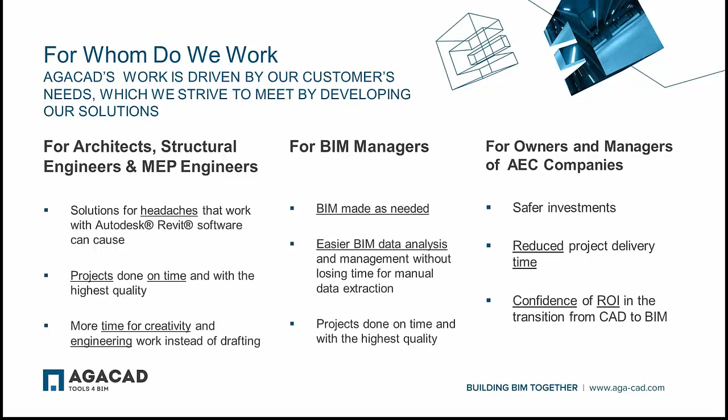The most important value of our team is customer alignment. We strive to respond to the needs of every client. Our work is driven by our customer needs, and the benefits we strive to deliver to our customers are less stress in daily work, easier BIM, and satisfaction with return of investment. Our promise to our customers is reducing BIM stress.

At the moment, we can divide all our products into 9 parts. Here on the top, we have a group called MEP Engineering, where you can find solutions for MEP engineers.

We have solutions for working with fire protection systems, air terminals, radiators, and for distributing hangers automatically. Then we have Cut Opening, which is very powerful for making openings around pipes, ducts, cable trays, and conduits in walls, floors, ceilings, beams, and columns.

Then we have BIM Tree Manager, which goes for managing parameters and parameter values that are used in the project.

Then we have 2 products in the Sustainable Design group. Then we have 4 solutions for browsing families and loading them into the project, and at the same time for managing your content - this is the group called Smart Browser.

Then we have Tools for Revit, where you can find different solutions for documentation and for modeling.

Then we have Smart Assemblies, which goes for making shop drawings for your concrete or steel elements.

Then we have Wood Framing. Here you can see 4 solutions for making wooden frames for walls and floors. At the same time, we can make rafters and other wooden elements for your roof. Truss Plus is very powerful for making wooden trusses automatically according to your roof shape. So those are very powerful solutions for using wooden frames and for framing your walls, floors, and roof.

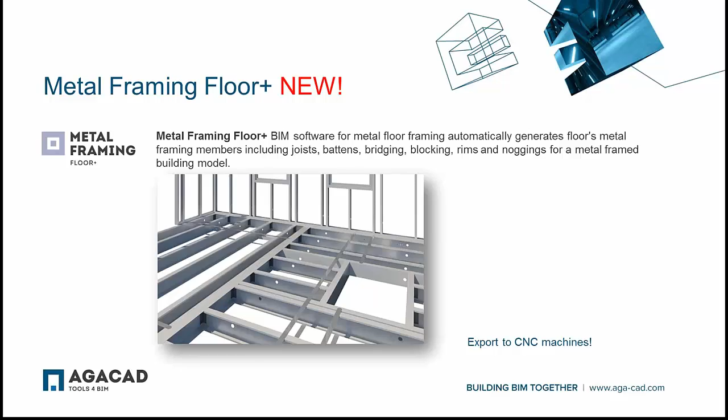Rafter Plus is very professional for metal framing, and here you can easily perform roof framing using light gauge steel elements. Truss Plus also provides a set of very intuitive framing tools for metal roof frame design. At the same time, we can also make shop drawings.

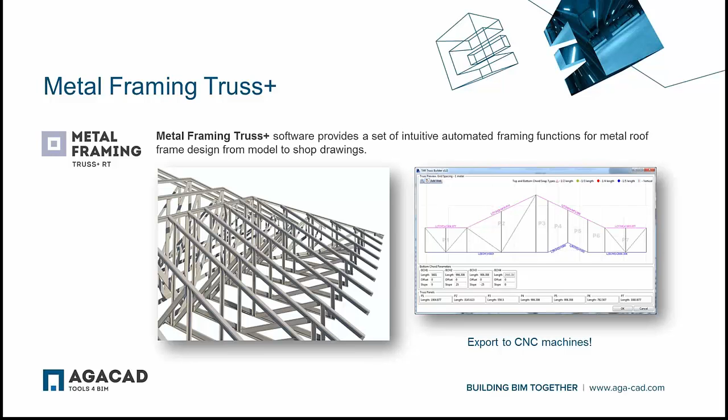First, I would like to start with the main types that we have at the moment, and for the Wall Plus we have created the most popular profiles.

So here we have CNC chamfered profiles and the CNC C+C system. Here, as you can see, there are chamfered ends of those beams, and all those families are structural framings, and all of them have analytical lines.

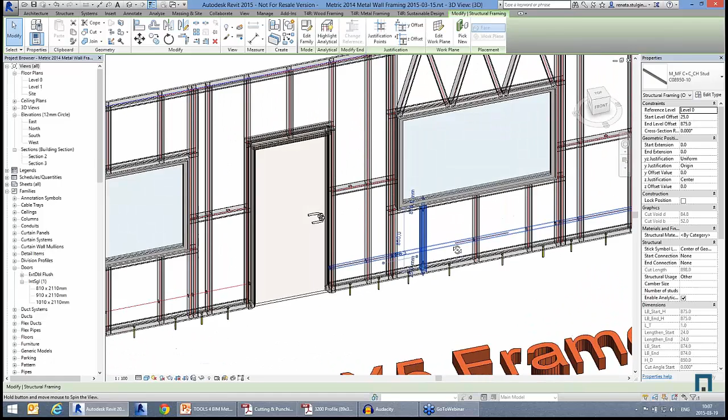For example, such kind of system is very popular for pinnacle manufacturers. One more type is also CNC chamfered, but this system is mostly used for Howick manufacturers.

Then we have C+C, the general frame, and as you can see here in this project, the tool can also automatically handle different metal connections.

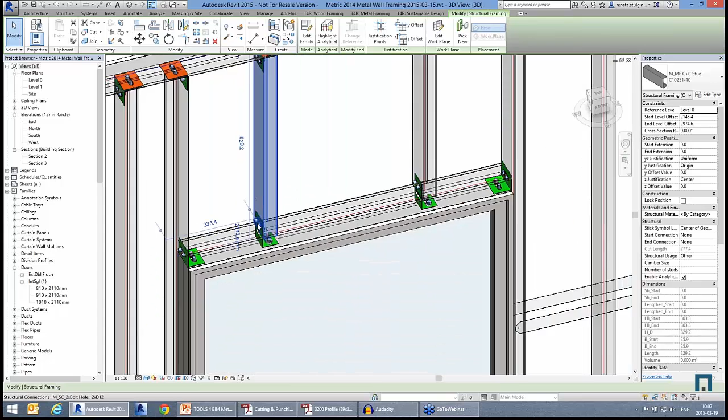Then one more type mostly goes for metal manufacturers, called C+U. Here you can see how those frames look. One more C+U standard frame, and let's take a look into those beams and the different metal connections between those frames.

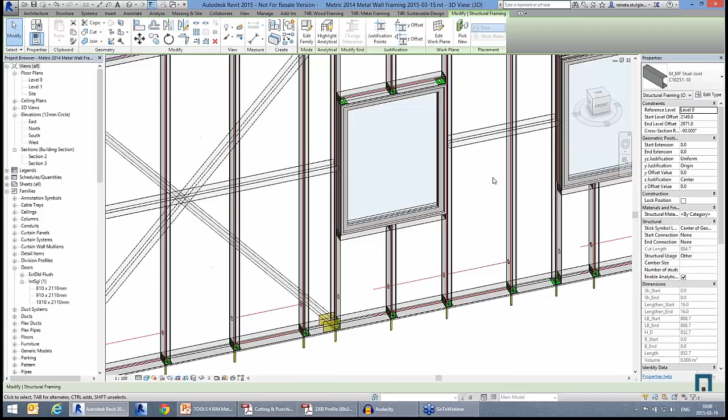Actually, these families are our sample created families, but anytime you can use your own if necessary. At the same time, you can modify those families anytime. Now let's start from the beginning.

I'm going to the project suggested for C+C and C+U profiles. Before working with the project, you have to load the families and schedules into it. The Wall Plus tools you can find in the separate metal framing Wall Plus tab. First you load the families into the project, then check the configuration.

You have to go to framing configuration. The most popular configurations are already created, but anytime you can save and change that for your future projects. At the same time, you can share that configuration with your colleagues.

Before working through that configuration, I want to note that we can add the main frame, but also the secondary frame, and you can have different framings placed into several wall layers. Let's take a look into those settings.

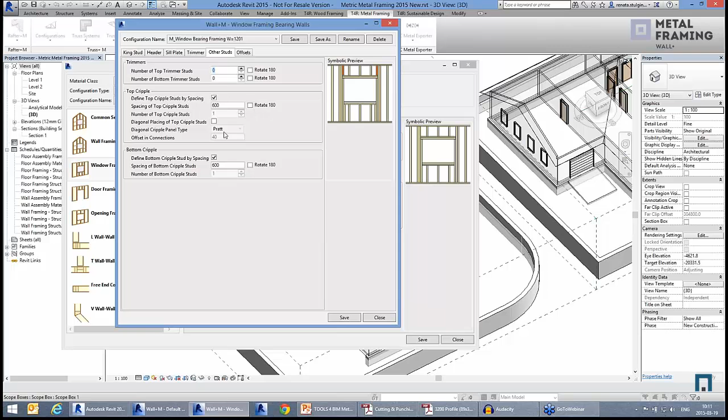Then we have window framing. Here you predefine the types you're going to use: what kind of header, what will be the sill plates, trimmers, other studs. Also you can predefine to use Pratt or Warren diagonal cripples, and additional offsets.

Very similar settings we have for the door framing. Again, you can predefine your own settings for different door sizes.

Then opening framing, which goes for cases where a duct or pipe is going through the wall. You can also predefine configuration for framing such openings.

Then we have L connections, and in the new version we added additional L connections. Then here we have T connections, free end connections, V connections. We can also add an additional ridge stud if necessary.

Then we have bridgings or noggings, so you can predefine the settings for adding those bridgings or noggings.

Then there is a new feature in the new Wall Plus version: we added continuous bridging or nogging additionally if needed, plus an additional setting for adding secondary bridging and nogging. Then we can add bracings, additional studs if necessary, and additional noggings.

Then we can add details automatically. At the moment, with my configuration, I'm going to add anchors, and here you can predefine exactly where to put those anchors into the frame.

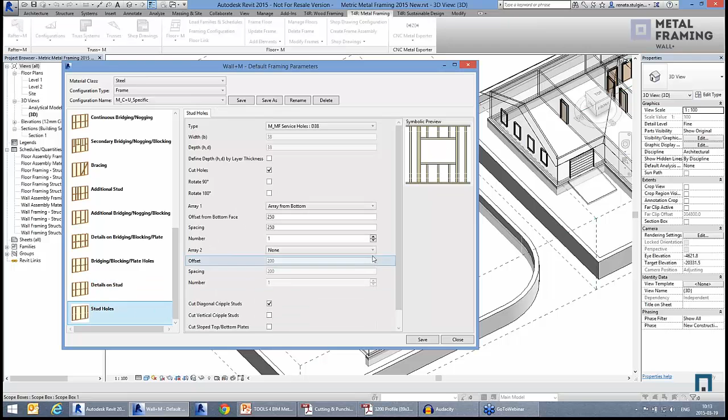It could be service holes, for example, for the cables and so on. You can save that configuration for future use under your own name, and as I said before, you can share it later with your colleagues.

After making that configuration, you have to make a link between the configuration and your wall layers. In my case, here I have the wall with 3 layers, and this is the list of all wall types used in this project.

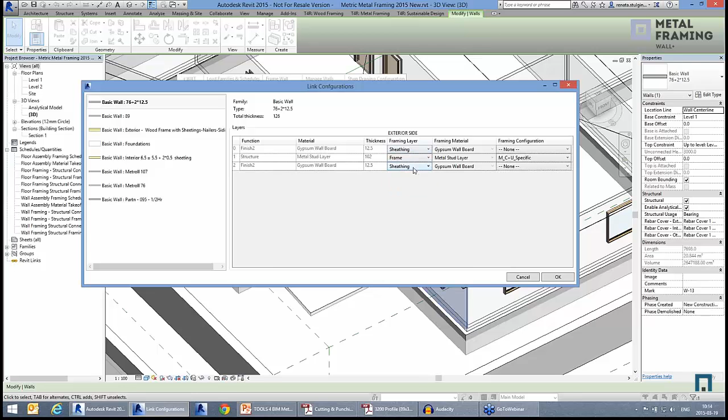Here you just need to say what exactly you're going to put into every layer. Into this layer I'm going to add the frame, using this configuration in this wall type. Then I'm going to add sheetings from both sides of this frame, and for one more wall type in this building I'm going to use a wall link, using C+C template profiles.

After adding that link, you just need to select the walls from the model. I'm going to select them from different building sites - it doesn't matter, you can select different types, and now the tool will add those frames into those walls. At the moment I have selected 6 walls, and now we just have to wait a minute for the tool to make all those frames automatically.

The tool will look into the configuration that we did before, and it will take a look into the link between the configuration and the wall layers, and then it will add the frames automatically.

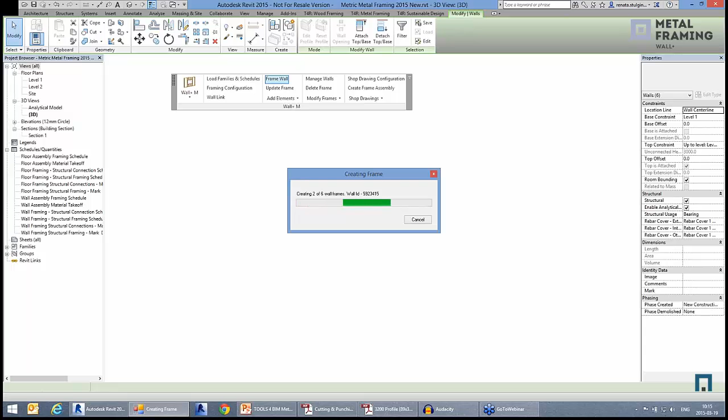Also, I want to note that all those frames are structural frames, and they are actually regular families created under the structural framing category. So those frames have all analytical lines, and you will be able to later use that model in a calculation.

You can export that model into a calculation system. For example, you can add loads here in Revit and then make a calculation in, for example, Autodesk Robot, and so on.

And also, all those frames - we have the possibility to export to CNC machines. So all those frames can be very easily exported to a CNC file and pushed into a fabrication machine.

Okay, so we're finishing with those walls. As you can see, the tool is showing you 4 walls that are already framed, and now we're finishing with the other 2 walls.

Also, if you have a complex shape of your wall, it doesn't matter - the tool will still handle really complex top or bottom shapes of the wall.

Okay, and we're finishing with making those frames automatically. You can just imagine how much time it would take to make that manually, using only regular Revit functionalities. Here we have spent about a minute for framing 6 walls.

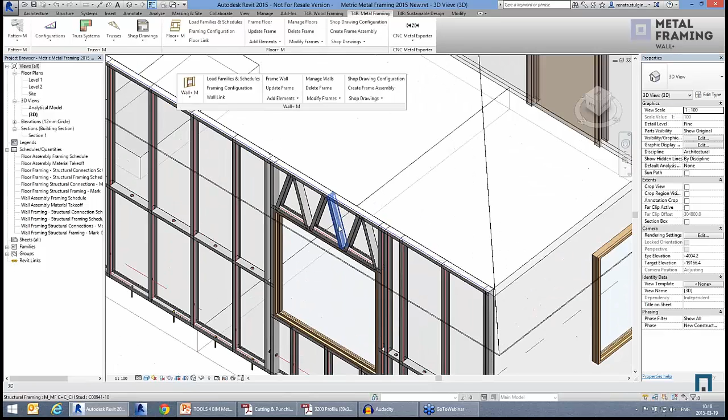Okay, so here we have C+C profiles, and we can take a look. As you can see, the anchors are already placed, and here we have the C+C profiles. Now we can take a look, and here we can see how the header looks above this window.

Now we can take a look into this model, and here we have C+U profiles and the C+U system. Let's look into the plan view - the frames are added into the layer where they should be. Now we can also take a look into the section above the window.

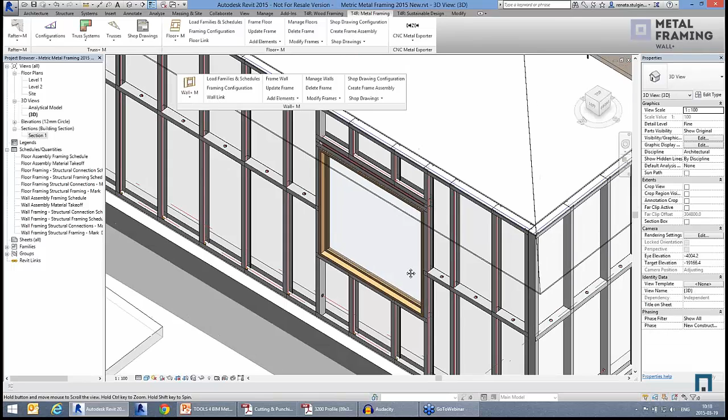Here we have such a header above the window. As you can see, we have a U profile, then two C profiles, and then a U profile on top. But this is only one configuration that we've adjusted for this window - it could actually be different configurations and different headers above the window.

As you can see in my case, we added different configurations for different window sizes. So for the small window we can use such a configuration, such headers, and for the bigger one we can use, for example, diagonal cripples if necessary.

Now, if we make any changes in the model - let's say I move this window a little bit - it's not a problem. Anytime, we can select any frame from the wall and just press update frame.

And now the tool will reframe this wall segment. Additionally, if we want to add additional elements, you can press on add elements, and there are many functionalities that you can add additionally.

So there could be a secondary frame, one more layer with metal frames if necessary, and then we can add additional studs. You just need to select the stud, predefine the settings, press OK, and the tool will add the additional stud.

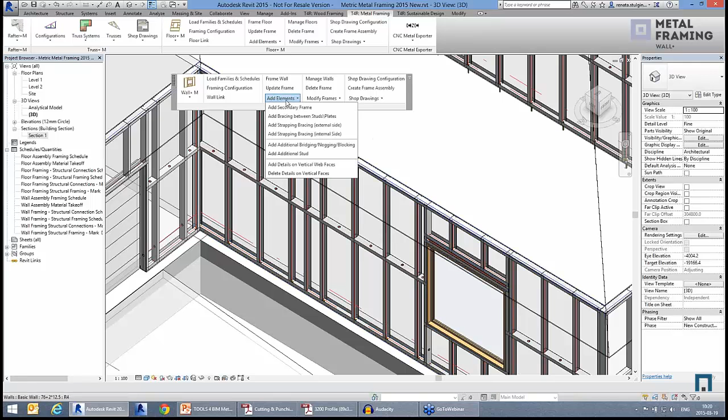Then we can add additional bridgings or blockings. You just need to predefine 2 studs, select the settings, press OK, and the tool will add the additional horizontal element.

Now we can add additional bracings. Let's go to add bracings between the studs or plates, and you just need to select families and elements between those plates. The tool will add bracings.

So it's very easy, just have to select different plates. Let's add from this side to this one, and again from here to here.

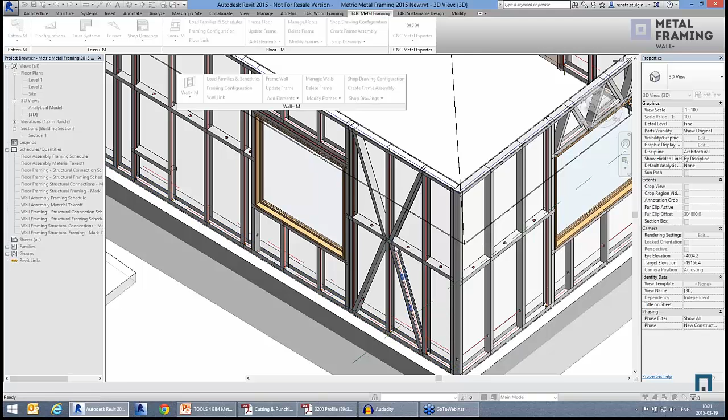Then we can very easily add additional connections. This is also the new feature that we added into the Wall Plus. Anytime you can go to modify wall framing.

Here let's go to the details on the bridging, blockings and plates, and you can add different plates and different connections. So here I'm going to add an angle connector, and I'm going to insert those details.

It will be on the open face of this stud side. Then I'm going to say it will be on the open faces on the top and bottom plates. Then I'm going to include openings, and add details if the host element is crossing the joist.

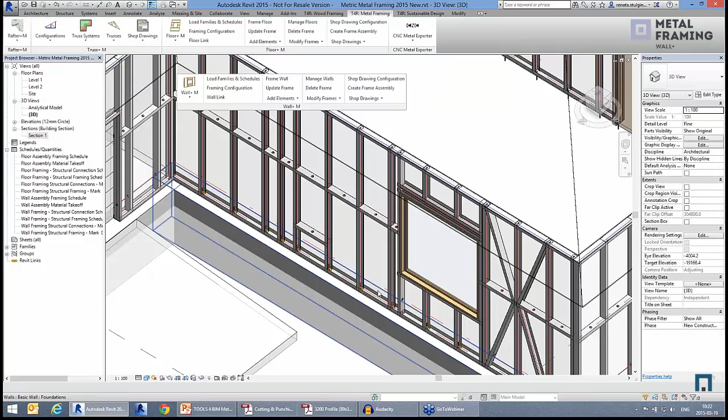So it's very easy, you just need to predefine the settings, press OK, and now the tool will add those metal details on our selected wall frame. If you want, you can actually predefine that in the framing configuration and add the frame automatically with all those metal details, but anytime you can add them additionally if needed.

And the same we can see on the top plate. We can see them here.

And the families, as I said before, can be your families. You can make your own family with your own design, and the tool will distribute those families. You just have to make sure those families are face-based families, and that's it - you'll be able to easily distribute them.

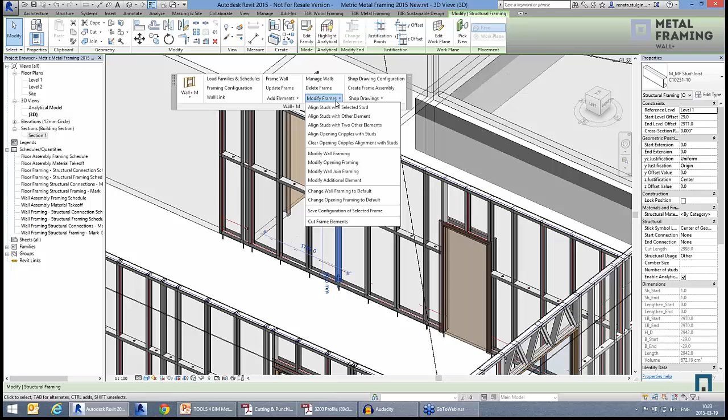Then we are going to modify this wall framing, and here I'm going to add straps. So I'm going to modify the framing and add the strap family. I'm not going to rotate this, and we don't want to cut that family, and I'm going to change the offset from the stud and from the plate.

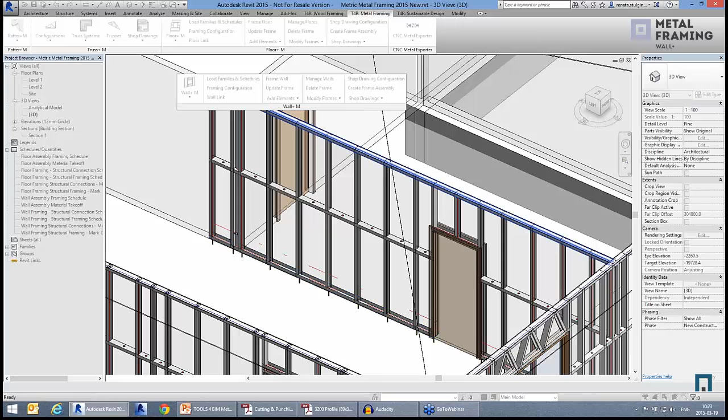After pressing OK, the tool will update this frame, and we will be able to add the bracing, but now the tool will know what kind of bracing I'm willing to add. So again, I just need to select the top and bottom plates, from the internal side.

And if it's necessary, you can add additional connectors. So here we're going to use - actually this could be added into the family. So we can also add an additional such plate.

And now, after making those frames, we can very easily make shop drawings, because now the tool knows everything about those families. Again, we can take a look into the analytical model. We can see that we have all those analytical lines, and we can make shop drawings.

So before making shop drawings, we have to go to shop drawing configuration, and this is very easy. You just need to predefine the views that you want to get in the assembly, because now the tool will make the assembly - collecting all families from the frame, from the wall, from one wall segment.

At the same time, the tool will make schedules, add tags automatically, and apply the view template for every view. So you can make your own view template with your own design, and the tool will apply that view template into, for example, the left side view, front side view, and the 3D view.

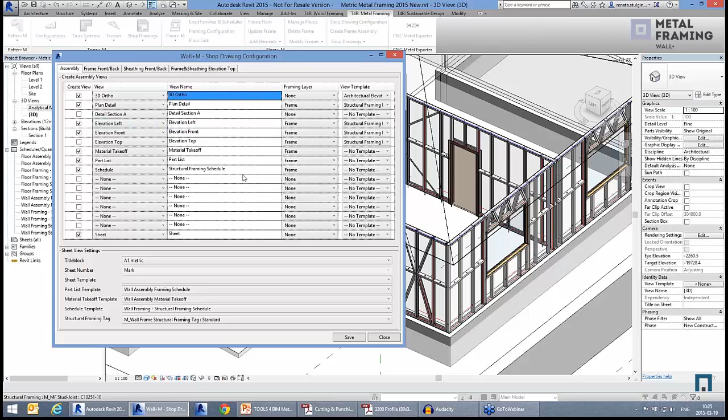And also you can make your own schedules with your own columns, and you can use those schedules as a template for making the part list for this frame and for making material takeoff.

So you can make your own schedule with your own columns and your own design, using the same schedules as created in my current project, and you can use that schedule as a template for making a part list or material takeoff.

Then you just need to predefine dimension types that you're going to use for the studs, for the vertical and horizontal frames, and additionally for the sheetings and for the top views. That's it, we can save that configuration.

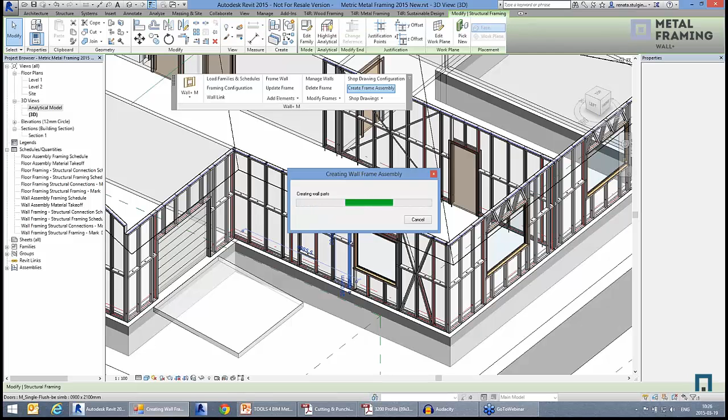Then we have to select any frame from the wall and go to Create Frame Assembly. Now the tool will collect all frames from this wall segment, then the tool will make all those views and add dimensions automatically.

Okay, so here we have a 3D view, then we have a front side view with all dimensions and tags. We just need to renumber our structural frames. For this we have a separate functionality that will sort structural frames, and then here we will see the numbers.

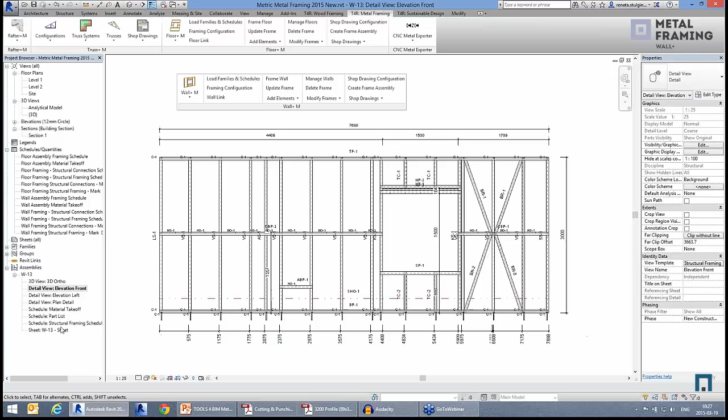And the same we're going to do with structural connections - we are going to renumber our structural connections automatically. So that's it, all those elements are renumbered, and now we can take a look again into the plan view.

Then we have material takeoff, then we have a part list, then a separate schedule for the regular frames without connections, and also the tool will calculate the mass for you, so it will be very easy to understand and get the total mass.

And now we can put everything into the sheet. So here I'm going to add the front side view, here I'm going to put the 3D view, then material takeoff, then the part list, and then a structural table only with the structural framings. Additionally, if it's necessary, maybe here we can add a top side view.

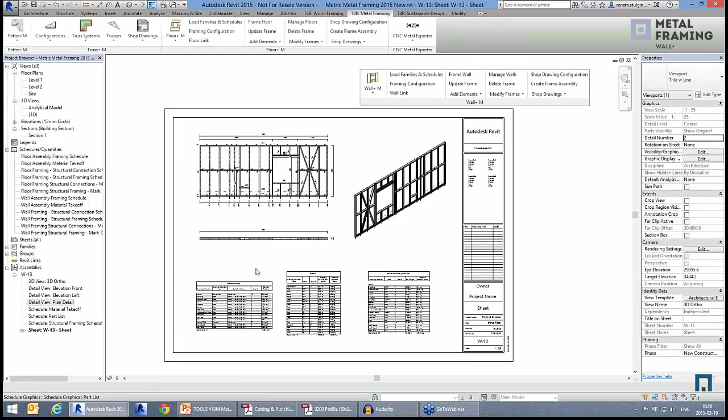That said, after making the first sheet, we can come back again into shop drawing configuration, and we can say that this sheet will be used as a template for the future assemblies.

Now I'm coming back again into my previous model. I'm going to use the same for my second wall, so again I have to select any frame and press Create Frame Assembly. Now the tool will do the same things - collect all frames, add dimensions, generate all those views - but at the same time, the tool will add those views into the sheet.

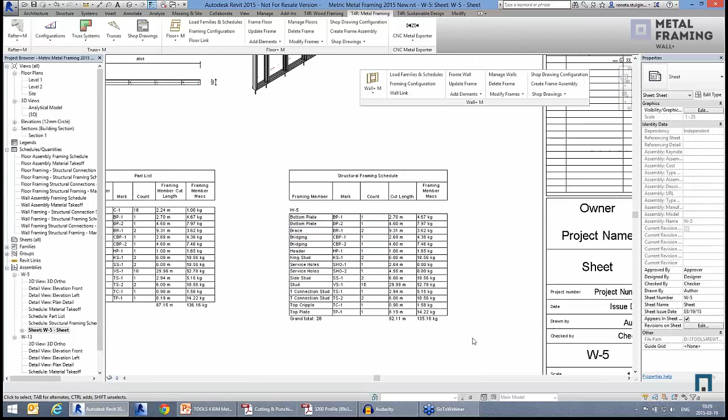Okay, and here we have really nice looking views with all those schedules. Elements are renumbered automatically. We have the length, we have the total mass, and we have everything about this frame, and later it can be exported into CNC. So this is an example that we did for one machine - we did such export for the walls and for the trusses.

Now let's take a look into Floor Plus. So this is actually our brand new product, but as you can see, it's very similar to Wall Plus.

The first thing that you have to do, again, is load the families into the project, but anytime you can modify those families if necessary. We're just providing the most popular families together with the product, but you can modify that anytime. And here you can get configurations for the main frames and for the battens, and that configuration, again, you can save for your future project.

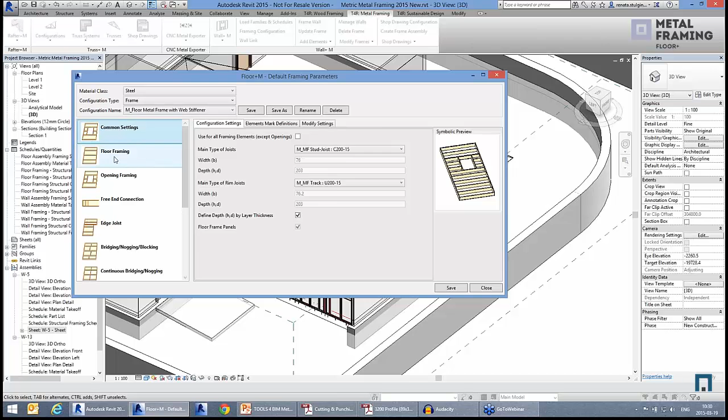There are very similar settings as it was with the wall, just everything goes for the floor panels. So you just need to add additional maybe joists, the bridgings, blockings, noggings, rim joists, and so on. So you have to predefine the settings, and again, you can save that setting for your future projects.

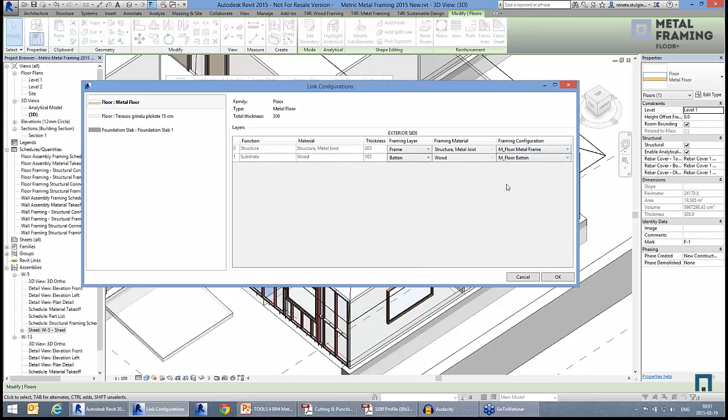And now if you have the wall and the floor, you just need to make the link. So let's take a look into this floor type - here I have two layers, and that's why I'm going to make a link. Let's say here I'm going to use the main frame with this configuration, and here I'm going to use battens in this secondary layer. Then, same as before, you just need to select your floor panels and use Frame Floors.

Okay, and now the tool is framing those two floors. It's adding—it actually looks into the configuration that we did before, and the tool knows where to put the frames because the tool reads information from the layer, and the tool makes those frames automatically, and adds connections.

So this is an extremely powerful product, and the scenario and main workflow is the same as it was with the Wall Plus. So if you know how to work with the Wall Plus, with the Floor Plus it will be the same. And as you can see in the Floor Plus, we also have the possibility to make shop drawings automatically.

Here we have those floor panels, and at the same time we have metal connections.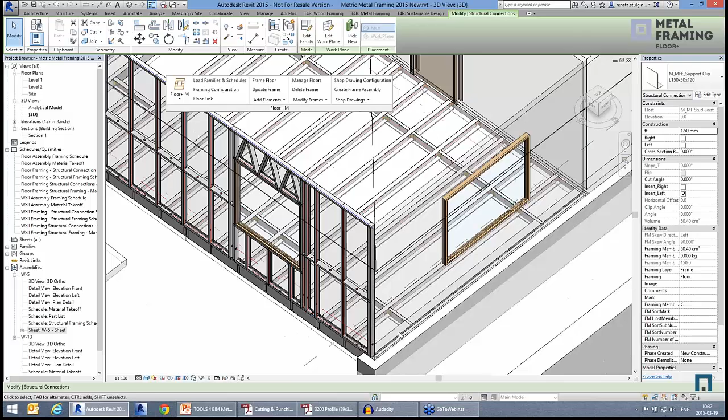Then we can very easily align the frames between the wall and floor panels if necessary, because here we have an additional possibility to align joists with other elements. So you can just select the frame from the wall, then select the frame from the floor, and the tool will align those frames for you.

And that's it—those frames are aligned automatically. And actually the families that we use, they are the same families.

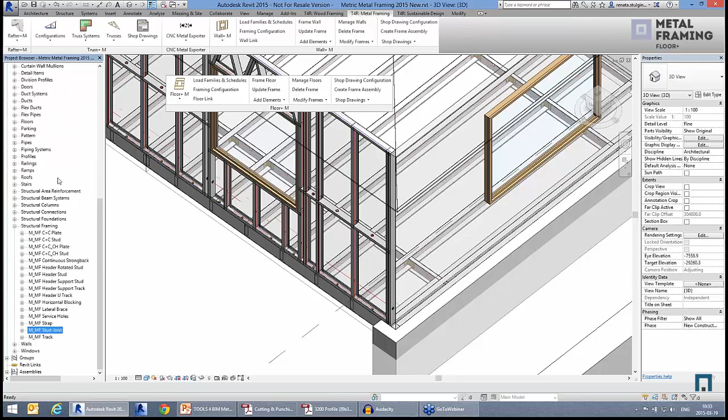If we take a look into the list of families that we use at the moment, you can see that the families we use for the wall and for the floor framing are actually the same. So we are using the same studs or joists, and also the same other elements—it could be the same for the floors and for the wall segments.

And then additionally we're going to add battens, so it will be added into one more layer that is below the main frame.

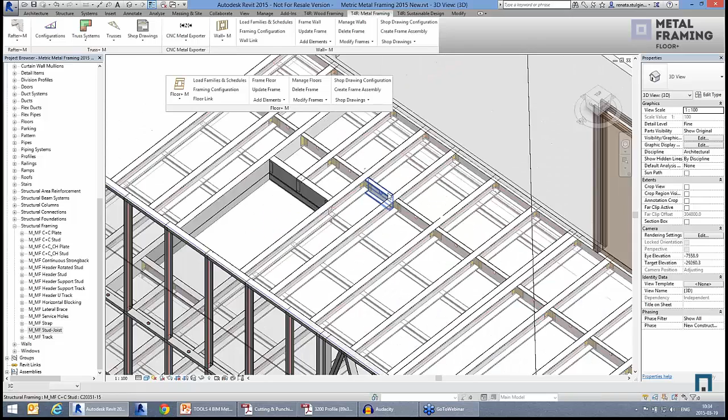And after making those frames, we can very easily make shop drawings. It's the same scenario as it was with the wall frames. So now we just need to select any frame from the floor and press on Create Frame Assembly.

And now the tool again collects all frames from this floor segment, and makes the shop drawing. It makes assembly views, adds the view templates, adds dimensions automatically, and we can take a look into this assembly that is created for the floor.

And again, we can very easily renumber our frames. Okay, and very easily we can renumber connections.

So it's the view for the main frame, but at the same time we can get the view together with the battens. Then again we have a material takeoff and then the part list.

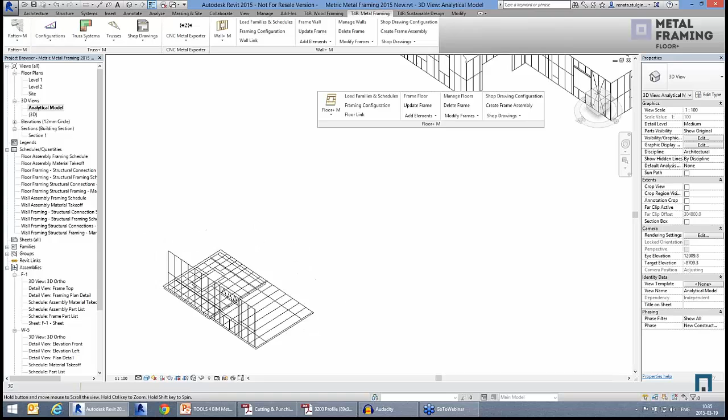And again, let's take a look into the analytical model. Here we have all those analytical lines created, because all those families are structural framings, and all of them can be used in the calculation system.

Okay, so thank you, and now I'm switching to Valence's screen, but just before that, I want to note again with the CNC machine that we can do an export the same as we did for the Metroll and for the Howick machines.

As you can see in this case, this is a specification from the Metroll, and there are operations that we use, so the tool automatically makes a separate file with all those operations and with all other necessary information used by the current machine.

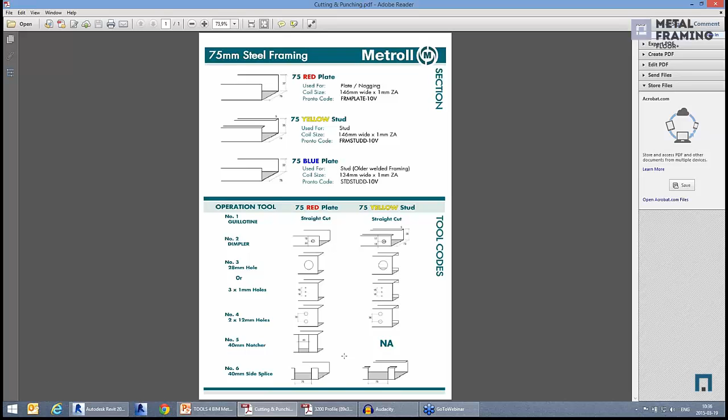But actually we can make an export to any other CNC machine if necessary. Just send me the specification of your machine and we will be able to make such an export to any machine you need.

Okay, so now I'm switching to Valence's screen, and he will continue with the framing. I will show you the Truss+ tool and the Roof Rafter Plus tool for roof structures modeling.

So I have this sample project here, and I will briefly run through the basic things you should know about this tool. The same as the previous tools, you have to load truss types into your project, then make some configurations, and then you can insert truss systems or separate individual trusses.

Then you can make drawings and export to CNC machines. So I already loaded truss types into this project, and you can see the configurations here.

I have 3 configurations for truss types here, and you can create more of them.

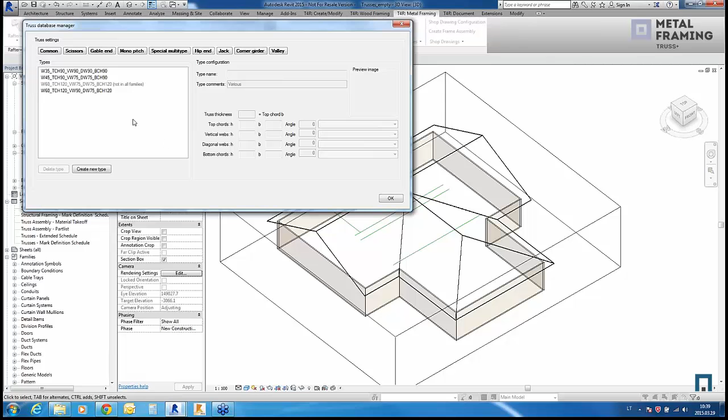You have new types now, and you can use them for your project for modeling later. So this is for truss configuration.

Let's go to the other configuration options for the truss system configuration, meaning what truss systems will be used for your model. We have gable end and hip end configurations, and we can modify or create new ones by selecting whether we will insert jack trusses, or only rafters, or corner girder trusses, choosing the type of truss by the top chord. We can create as many types as we want, and later use them for generating trusses.

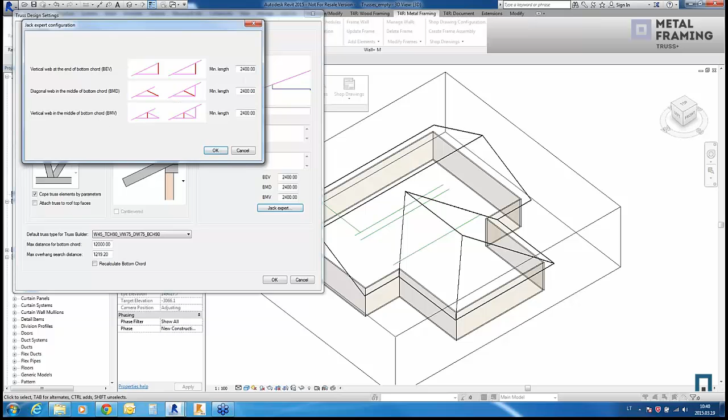Another thing is truss design settings - configurations for the jack and corner girder trusses. We can define how vertical and diagonal webs will be placed, what length, and so on. We can configure that or leave it by default. This option shows how elements will be cut to one another, and the end type of truss - we can select one of these. We also need to select the type of truss which will be used for our truss generating tool, which I'll show you later.

After we make configurations, we can go on with truss generation. First, I will show you how to generate a truss system for our roof. I will select this roof and pick the edges of my roof to define where the system should be placed.

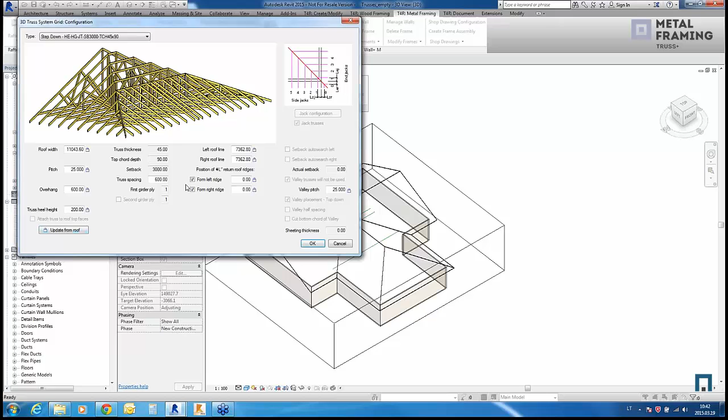Let's see how the solution will insert a 3D grid of trusses to my roof. So now we have a grid for the trusses. We can overview if we are happy with the form of this grid, and we can generate trusses in the place of this grid.

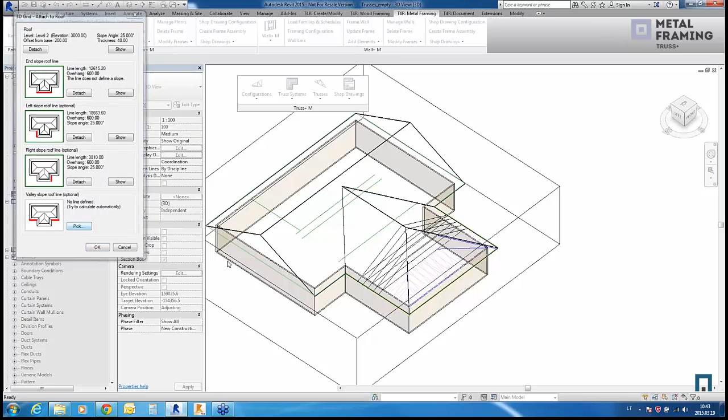I will add some more grid systems here at the end of this roof. Select the appropriate edges, and let's see - again we have a recommended type, and we can choose the type that we need.

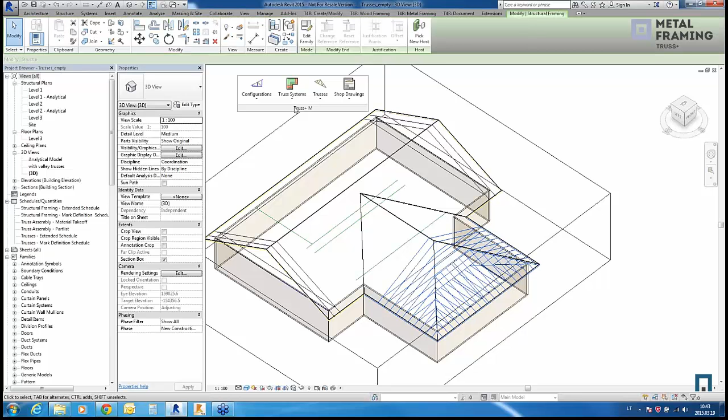We will create another one here because I want to show you all the roof trusses generated. Okay, so now we have some grids, and we can generate trusses by hitting the generate truss button.

Now we have this window where we have to select the type of truss which will be used for common trusses, for hip trusses, for jack trusses. We can select from the list the type of truss we will use. I will select the Fink type of truss for common trusses, and leave the rest by default.

Let's see - the tool will generate trusses in the same form as the grid system we already did, and it will cut elements according to the roof, cutting elements to each other, automatically. We will not need to go through the plans and sections and plane setups to make it manual, because catching all the angles manually would take a lot more time than this.

We can watch the progress or think about other issues at the design stage, so we save time to spend on thinking and design instead of modeling.

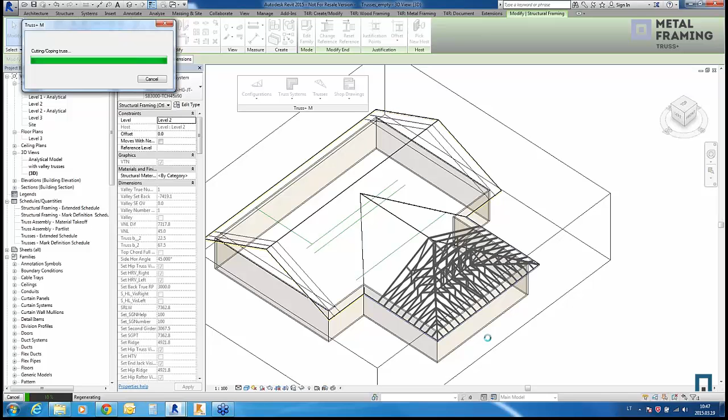We need to again select the types of trusses, gable end trusses. Let's see, it will select only two or three trusses.

Okay, so we have here gable end truss with window here, so we can insert this window, or we can just remove it by using family options. Let's do this same for the other end, so we can make sure we can do all the trusses for the building or the roof.

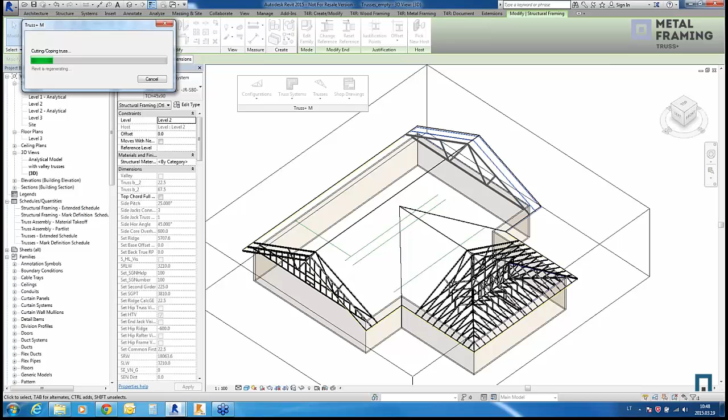So I want to show a few examples how to use truss systems and how to create separate trusses by using model lines. I have prepared here. So we have this truss systems, and we can use now other options to generate more trusses.

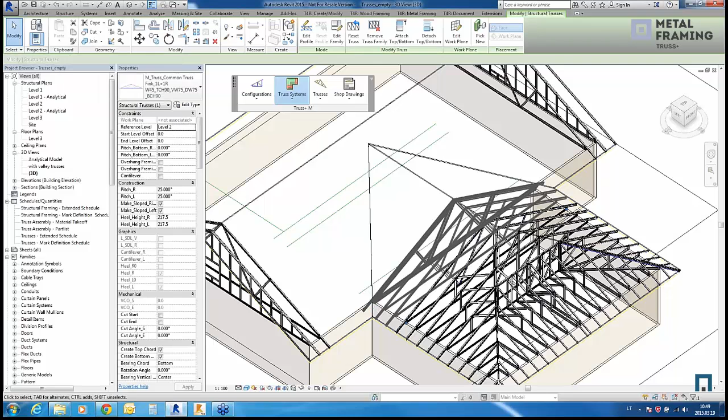I can select one of the trusses, and do like a photocopy of these trusses. It will generate by the same step as defining system grid. It will generate additional trusses until the situation is changed here, and it will generate 2 trusses for me here because it was also in configuration, so I can use them for support, and I can do the same with other trusses.

Let's see how it makes a copy of these trusses. 600 millimeters. Okay. And copy the same method here.

Okay, it cuts the overhang of the truss because of this situation here, and automatically, so we don't need to know about this.

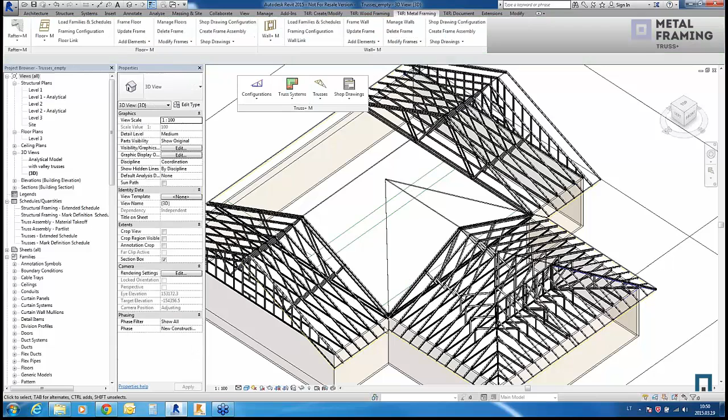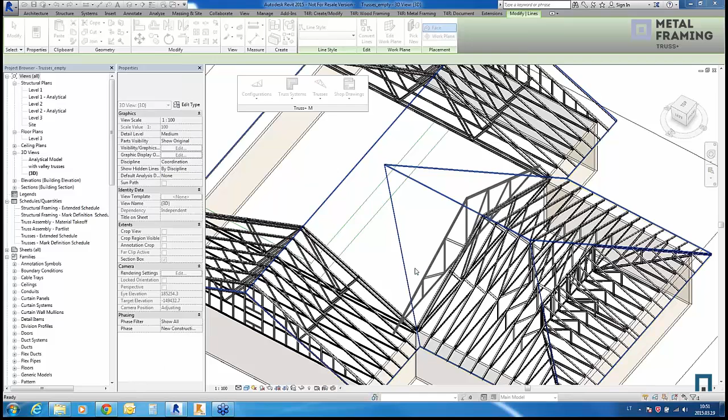So you will see the result. But the model line is just a model line which is drawn at a level of top of the walls. And we can see now that we have this kind of truss over here. I drew the model line from this truss to this truss, so we can use these trusses as a support for this truss. Okay, and I can do the same with other model lines.

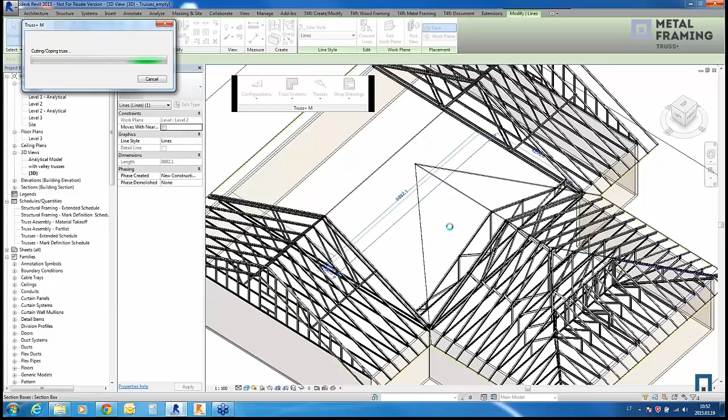I will again insert trusses by selecting model lines. I will select the type, the same type, and let's see. Now this model line is drawn at the edge of this roof intersection, and the truss has parallel chords.

And now I will use another command. I select these two trusses, and I select command to generate new trusses with a spacing like this in the middle of them and update from the roof. So it means that the tool will automatically create trusses, and it will update the shape of the truss according to the roof, because these slopes are different, and it should change the position of the top chord and add an element of depth and vertical struts.

So let's look at it. Yeah, so we see that it inserts the truss, then adjusts this truss now to the shape of the roof. And the step was 600 millimeters, so it creates a truss with this defined step.

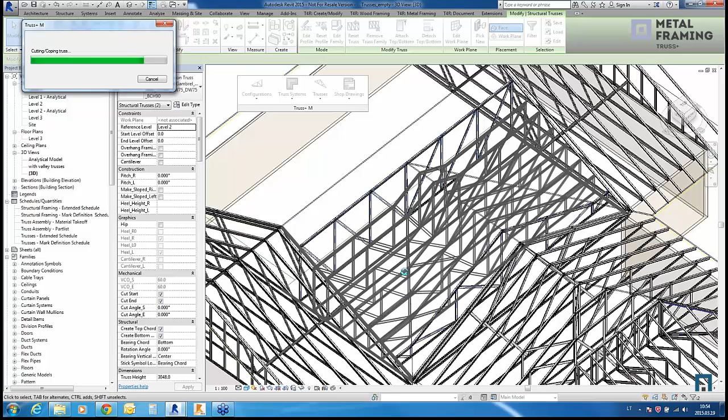Okay, it's almost over now. It will be really big headache if I would like to create this manually. Now we can see and enjoy all these new trusses.

Yeah, it's nice. Okay, and I will make another one truss here as a supporting truss. Select the same type, and I want to create monopitch trusses to this direction and support them on this truss I'm generating now. Okay, so I have this truss, and I have drawn already a model line here. So I will hit this model line, selecting trusses by selecting model line, and now I will select monopitch. This one. Okay.

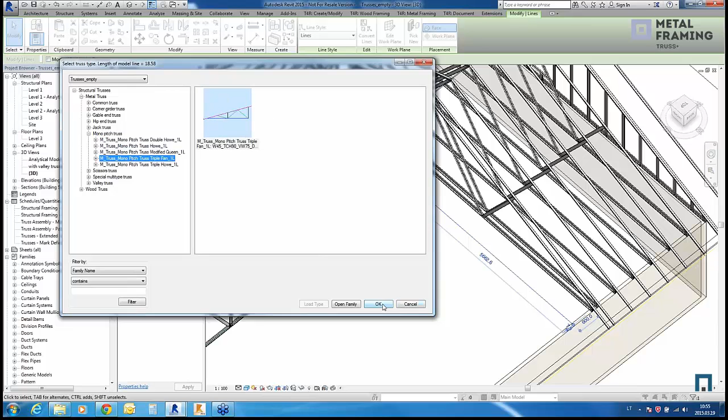So we have these tools to copy, to arrange trusses, and we can use even this simple function like copy, array trusses. We can do the array. I know the distance already, so I just enter the number and I will hit OK. So it will place 16 trusses to this direction with a step of 600 millimeters. Yeah, so we can just look at this now.

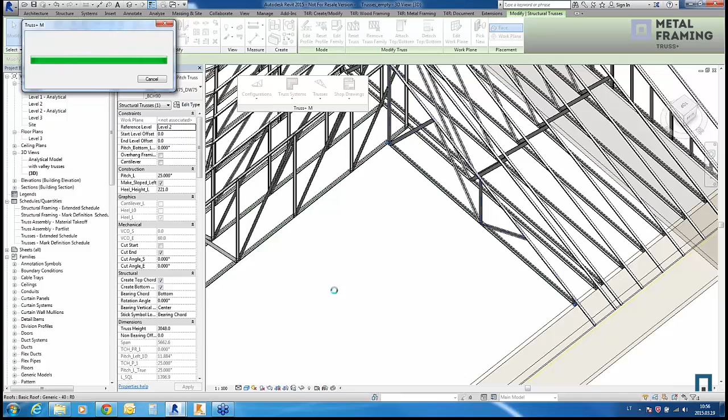Okay, so I think it's okay. This roof has the structure now. I showed you what I wanted to show: how to generate truss systems, how to generate separate trusses, but another powerful tool is to create truss type from model lines. I will show you how to do this in a different project here.

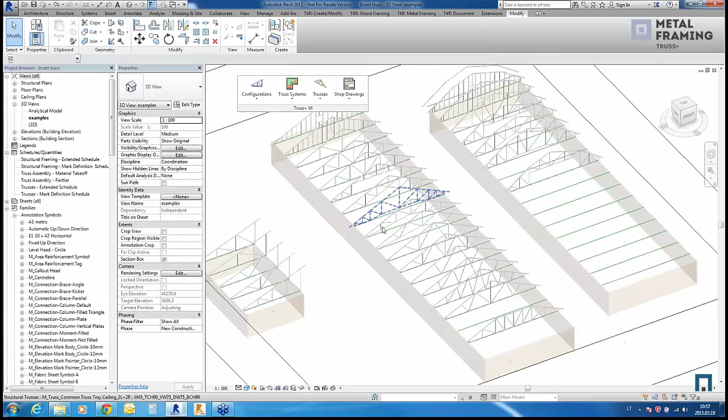I will show you the tool I mentioned, how to generate unique types of trusses.

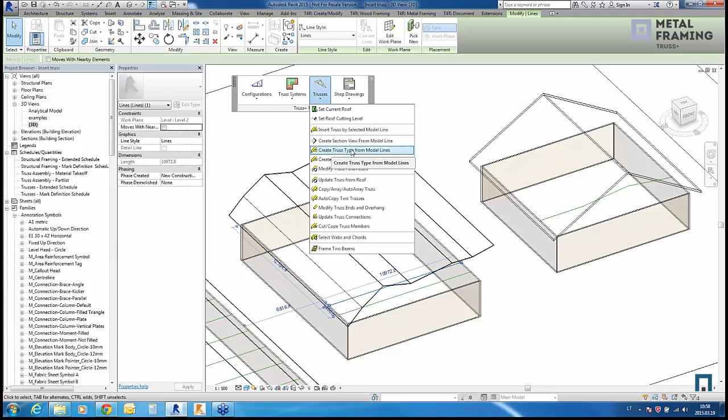Then we have something like this. The roof is a very different shape, so I will create a truss by using this function to create truss type from model lines, and I select the roof. Now we can see that the top chord goes like the roof, and the bottom chord is the same as the model line. And we can add webs here.

We can use a drawing tool. We have some snapping options here, like you can see. And I will do it like this. I hit OK, and now I can give it a new name. OK.

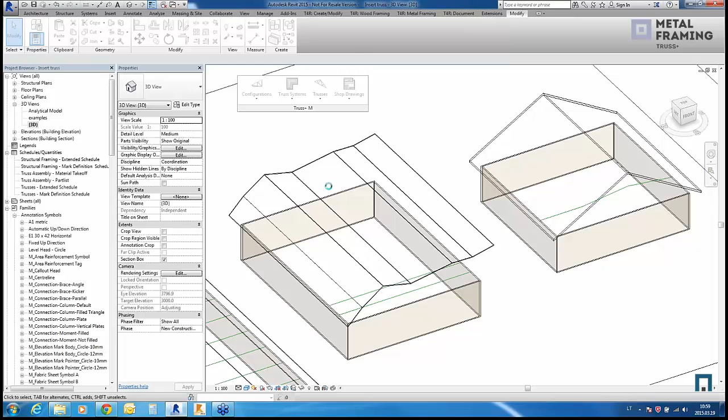It will be grouped under the special type of trusses. Let's take a look how the software solves this task. It will create a new type of truss. Because there are so many configurations of roofs, we need this tool to solve this kind of task, where you cannot predict what the roof type will be.

So now we have this truss, and we have it as a type, so we can work with it. What is also important is that your bottom chord may be not only horizontal, but you can make it like this, on different model lines with some angle.

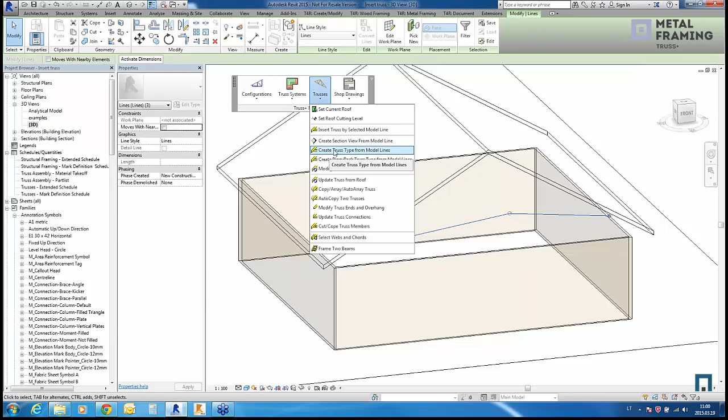I will use the same option to generate a truss, and now you see the bottom chord is a different configuration. We can now just add our webs and hit OK, and have some new type of truss.

So we have some typical trusses, like 50 of them, and the option to generate any type of truss you want, and you can do it very easily, just by picking the lines and using the roof as a top joint position. So now you see the truss here.

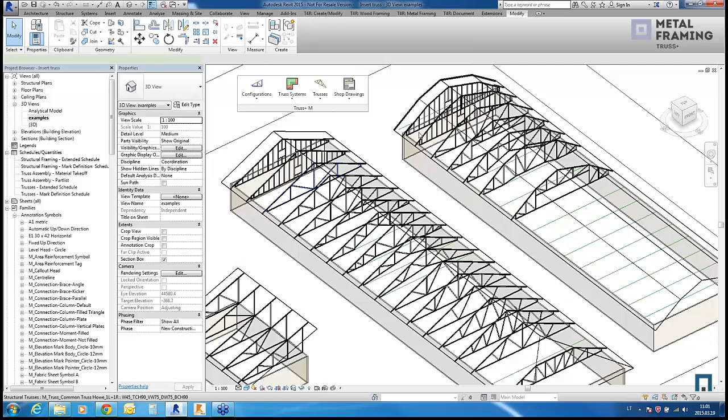The other thing, if you want to make drawings, you can also do that. You can select and calculate truss volume, sort the trusses by inserting unique mark numbers and taking framing IDs, and so on, and you have to make some configuration for your views. You can create views, select view templates, what tags will be inserted, and select what schedule templates will be used, title block, and so on.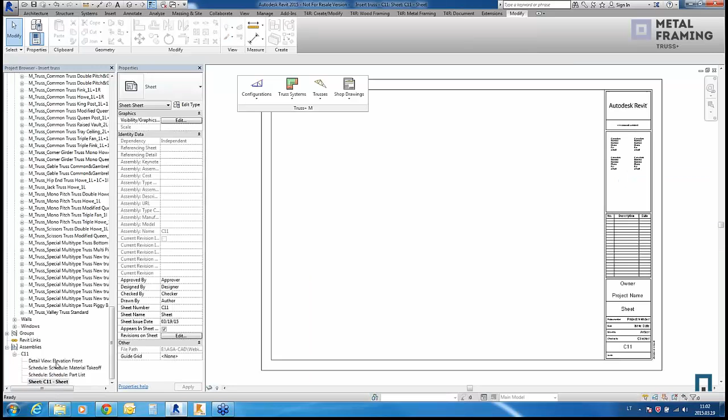After you select the truss and make some sorting, you can create an assembly of this truss, and under the assemblies you will find the truss with views, which you can insert and use for your documentation later. Now we have the sheet, and we can change the configuration and use this sheet template as a template for other trusses to create assembly drawings for the other trusses, as you saw in another presentation.

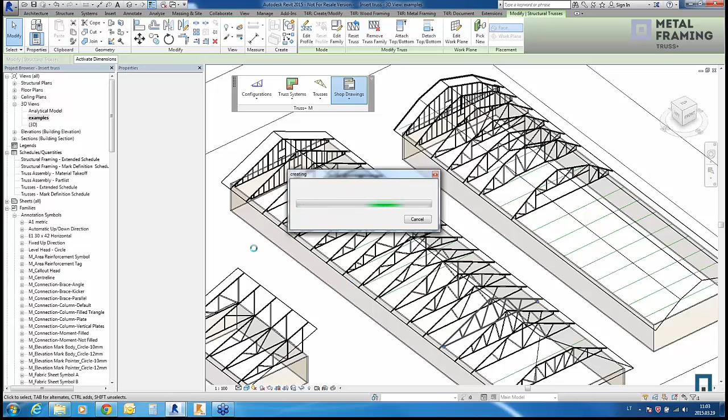I will select one more truss and just take a look how it is done. We have a new assembly and we have drawings - dimensions, tags, and schedules of all the elements, the characteristics we need, and so on.

So that's what I wanted to show you with trusses. You have even more options here, but let's just stick to the basics for the beginning. You can see that you can do a lot of good quick modeling and make quick drawings and export to CNC machines, as Renata will explain more on that.

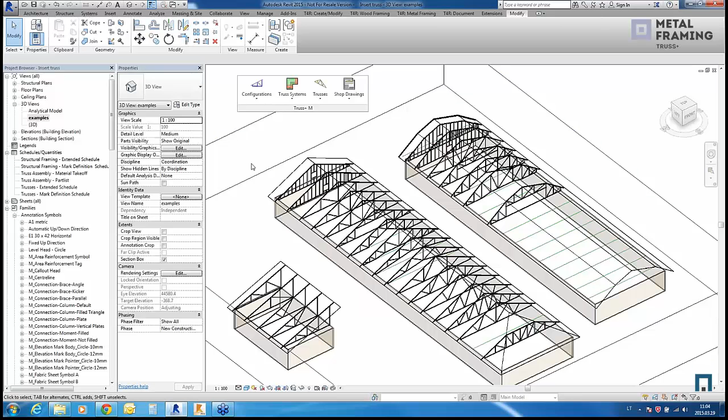So this was trusses for roofs, and I can show you the other option, like by using truss systems which were created. You see these elements between trusses - you can see valley trusses placed here, and so on. So there are more options in the solution.

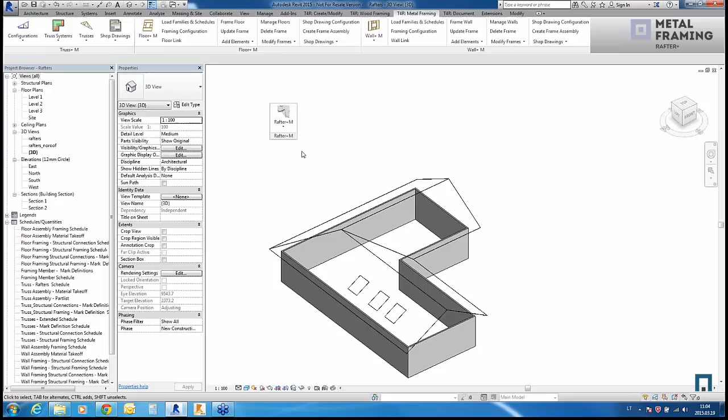I will finish with trusses now, and let's go to the roof, where I would like to show you how to work with the RAFTER tool. So I will drag it here. It's the same like with other solutions - you first load families and then use all these tools to create and modify the elements.

So I just select my roof. I create common rafter systems. I choose the end cut of my rafter. I choose the type of my rafter and the spacing, and where it should be placed according to the roof.

So it will generate frame systems on the roof, aligned according to the roof, and you can see that they are placed according to the slope of the roof. Now I have 3 windows here, so I would like to make openings in these beams, so I can select a command to create openings in these systems.

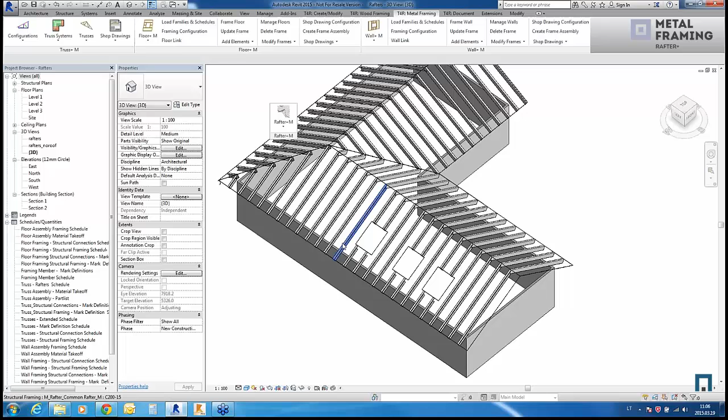Let's see the result. Okay, we have cut our rafters, but it would be nice to have some framing around openings, so I will use this command, using the same profile for this. Now we have the framing inserted between the rafters to frame openings.

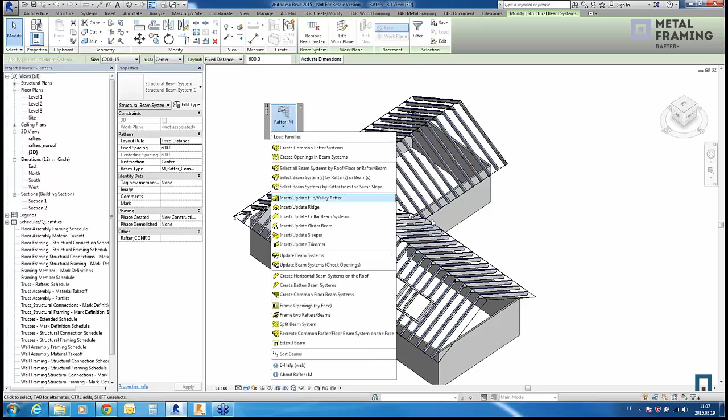Let's go further and insert some valley. I will select all the beam systems and insert hip and valley rafters, using double C profiles. So it will insert the hip rafter here and the valley rafter here.

At the connection points of our beam systems. Now we can see this element here created, following the line of the roof. We can select two rafters and insert a wedge element between them.

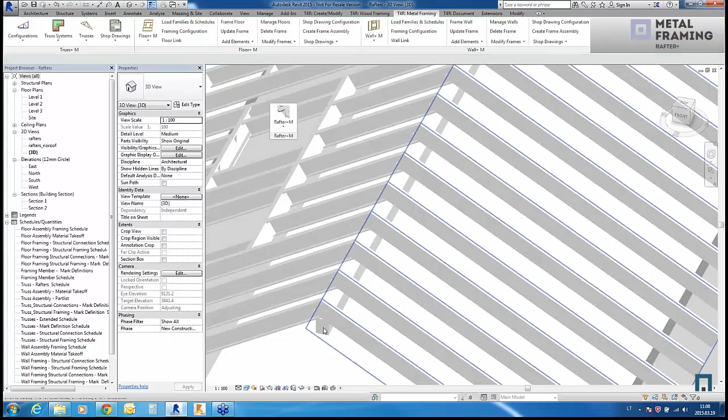So I select an option for how the wedge will be inserted, using two profiles again. Let's take a look. Okay, it's already inserted at the bottom of my rafters.

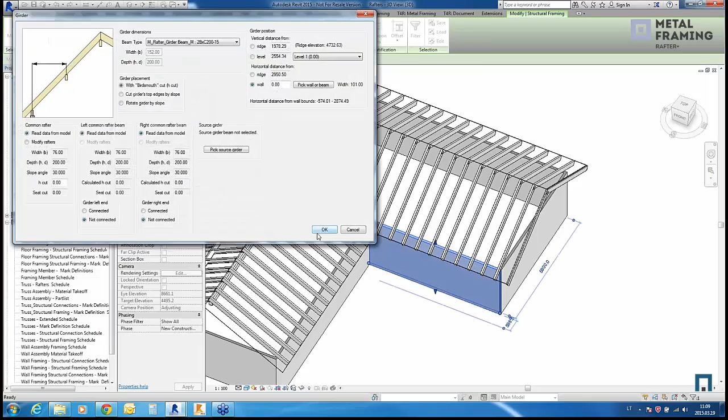So this is one option, and another one is we'll insert girder beams again. I will select the girder type and the distance from the ridge, rather than from the level. I will choose not to cut them and pick the wall. Now I have another girder beam here under the rafters, like I wanted it to be.

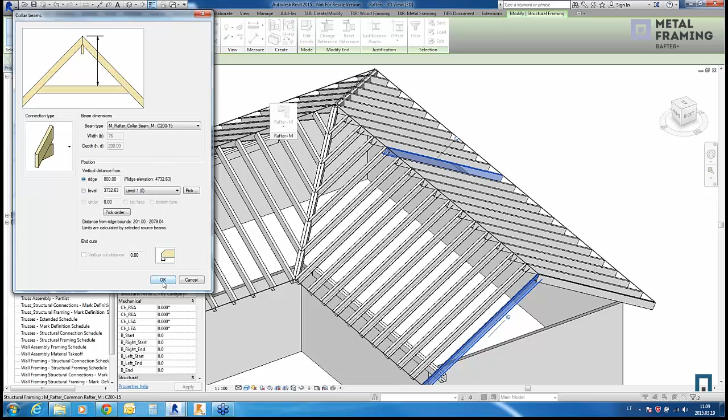Another option I will show you: I can select two rafters and insert collar beam systems. We have a connection type here, a beam type, and distance from ridge or from level again. Okay, we have some elements between rafters inserted automatically.

What else can we insert? We can frame two rafters with beams, then choose element, spacing, and justification, and we can see elements inserted between these two rafters.

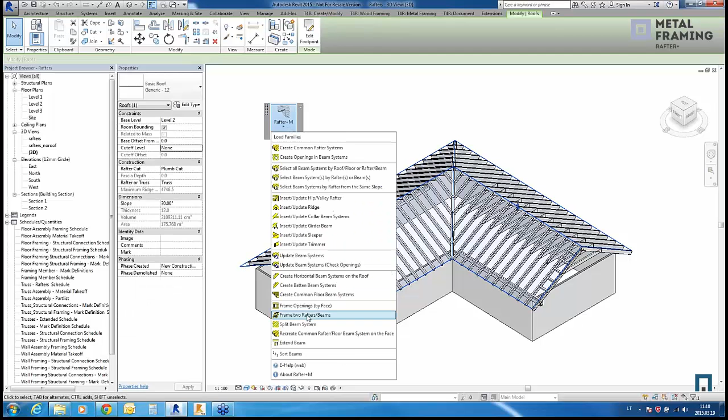Now I would like to show how to insert a batten system. I will select roof, then insert create batten beam systems. Select the profile, the distance, place at the bottom of the roof, and set the justification at the bottom, making it horizontal, then click OK.

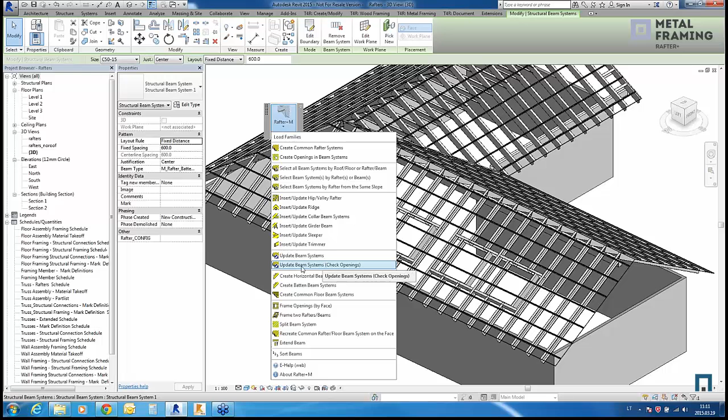So now we have batten elements placed on top of the rafters. It's nice, but these batten elements are going through our windows, so we have to select this system, click update beam systems, check openings, and in element options click OK.

And now we have openings got full of batten elements. So that's it with roof lightweight steel structure solutions, and thank you for your attention.

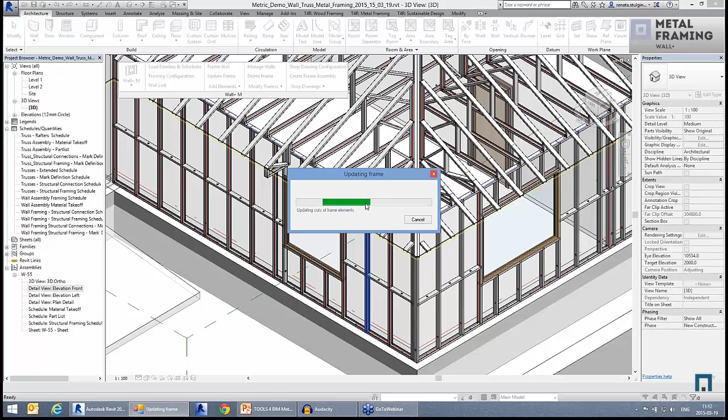So anytime you can make changes, make alignment with the existing trusses, and our shop drawings will be automatically updated. If you do any changes in the model, you can go to assemblies and see those changes in the shop drawings and make those prints. So it's very easy to modify the model later and update it according to different project changes.